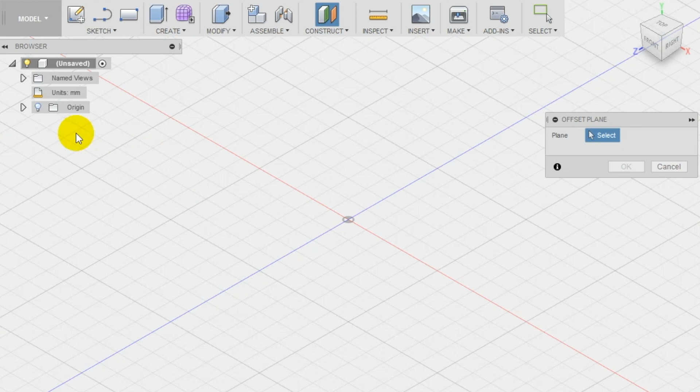Step 1. Let's start creating the seat. First of all, we need to create an offset plane of the top plane. Use the Offset Plane tool in the Construct section of the top menu and create a second plane 75 mm distance from the top one. This distance is the length of Barbie's legs from the ground to the knee.

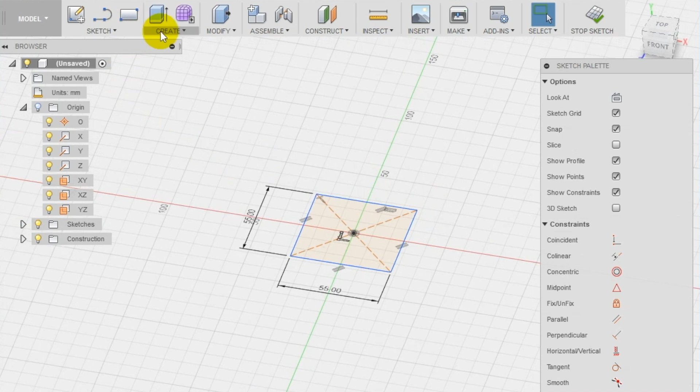Create now a new sketch on this new plane and using the Rectangle tool draw a square of 55 mm by 55. Make sure to set the center of the square aligned with the origin and then extrude the seat using the Extrusion tool and set the distance at 5 mm.

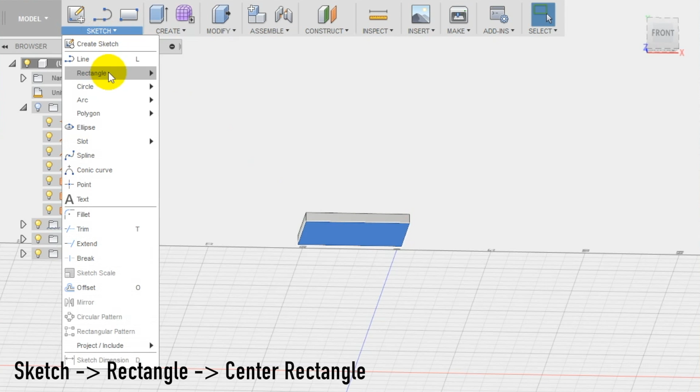Step 2. Creation of the legs. Start a new sketch on the bottom part of the seat. Keep in mind that every flat surface can be used as a plane to create new sketches and apply new functions. Use the Rectangle tool again to create a square in one of the corners of the seat. Use the Sketch Dimension to set the length of each side at 5 mm.

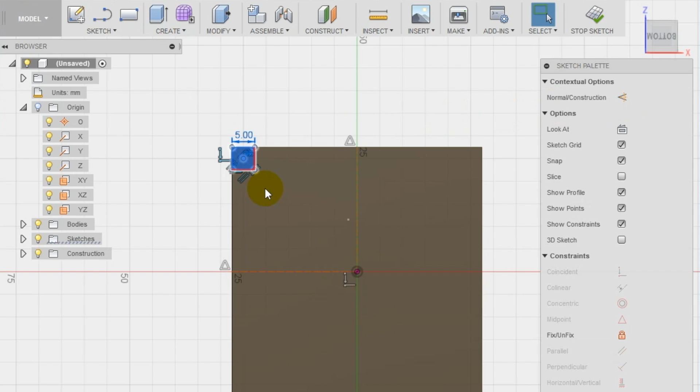Then use the Line tool and create vertical and horizontal middle lines. Then use the Sketch palette to convert them into construction lines, because we want to use them as symmetry lines. Select now the square and using the Mirror tool in the Sketch section of the top menu, create a copy of the square, selecting the vertical line as mirror line.

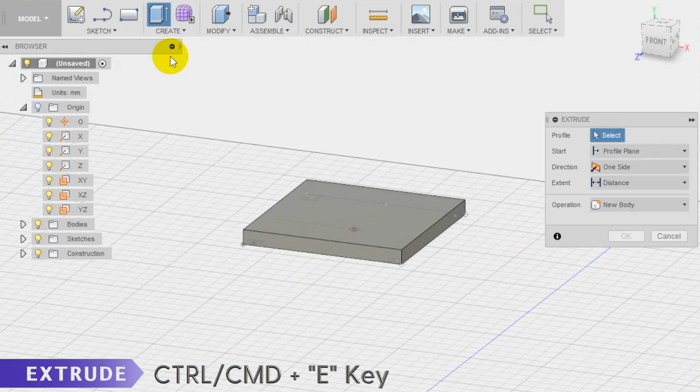Repeat the same operations, selecting both the squares this time and mirroring them through the horizontal line. Now you have 4 squares in the 4 corners of the seat. Select the Extrude tool now and create an extrusion of the 4 squares. Set the distance of the extrusion at 75 mm, which is exactly the distance from the seat to the top plane.

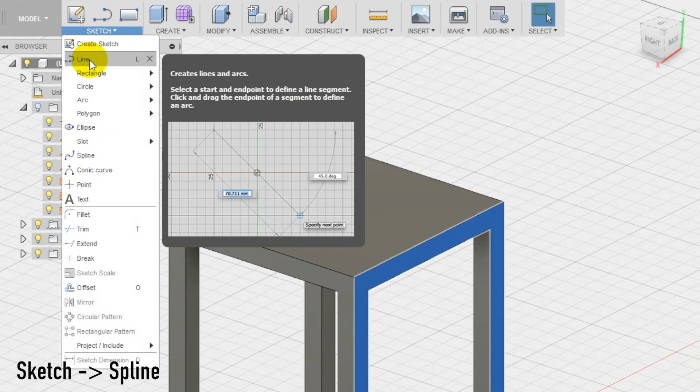Step 3. Creation of the back. Start now a new sketch on the back part of the model, which now is a sort of stool. Use the Spline tool to create this curved and organic shape, starting from one vertex to the other one. Use the Spline tool again to create a second line, following the first one and keeping it only a few millimeters away.

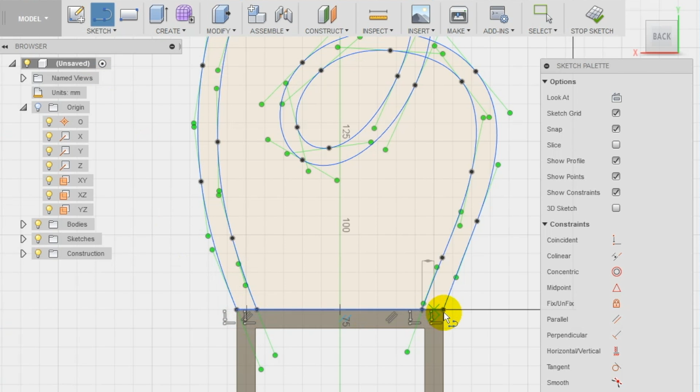In the end, use the Line tool to close the sketch in the bottom part. Now we have this intricate space between the 2 sketches. Use the Extrude tool again to add some thickness to the back. Make sure to select all the elements of the back and set the distance as 5 mm. Make sure to set the direction towards the seat of the chair to connect all the elements properly.

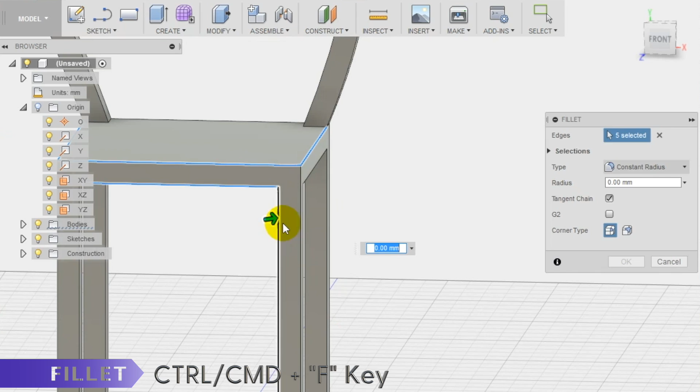Step 4. Creation of the details. Use the Fillet tool now to refine the design and make the edges of the seat smoother. Use a fillet radius of 0.5 mm to round the edges of the seat and the legs. And the design chair for our CEO Barbie is done.

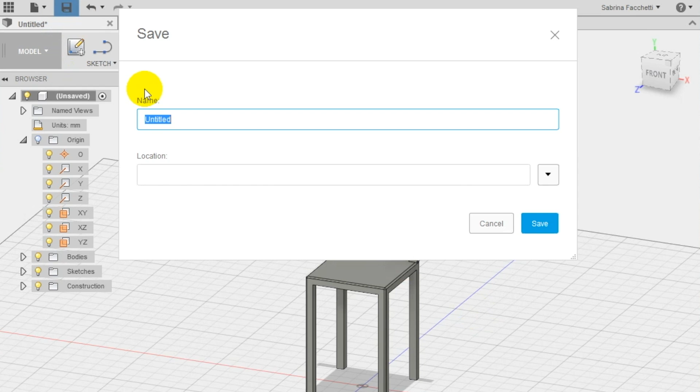Step 5. Save and export the STL file. Save your design in Autodesk Fusion 360 Cloud. I'm saving my file as Barbie Design Chair. Once saved, the name of the file changes, also at the top of the left menu. Right-click on the new name and select Save as STL to export the file for 3D printing. Congratulations! Now your CEO Barbie has a cool design chair for her office.